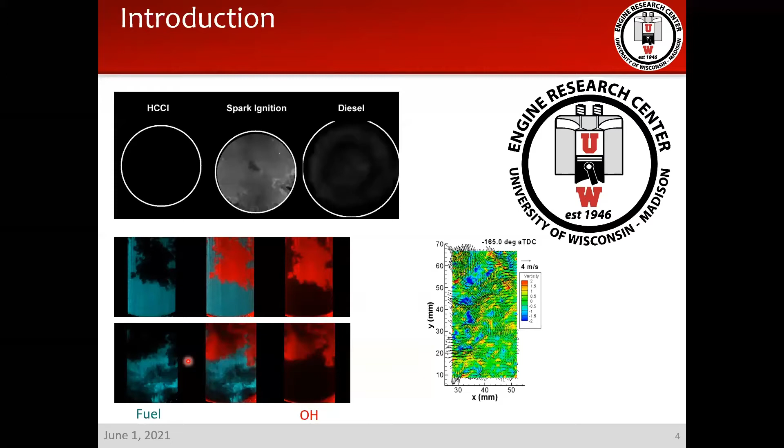So let's define the problem. If we're going to compare batteries and engines, we need to know on what grounds we're going to make the comparison. The first possible choice is local air quality - all of us enjoy breathing clean air, and there's obviously a difference between batteries and engines in that regard. But my argument is that the legislative environment is going to control this problem.

Engines have been regulated for 50 years now in terms of pollutant emissions. That has made major advances in terms of air quality, and as needed, I'd argue that's going to continue to happen locally. It's not really the controlling factor for this discussion about batteries and engines.

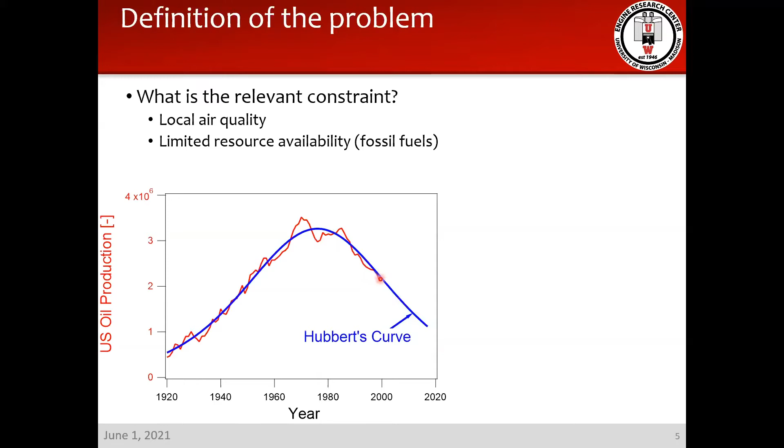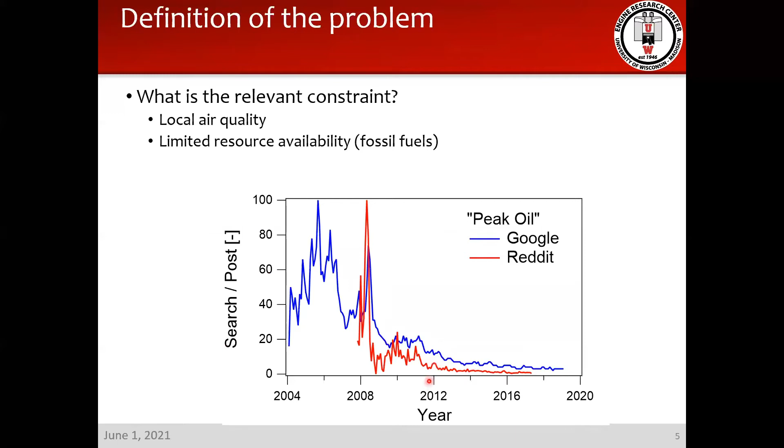Circa 2000, for US oil production, we were on the downside of that curve. If you look at searches on Google or Reddit from 2004 up to 2015, 'peak oil' was a search term quite frequently - but then at about 2012 it almost goes silent. Why? Because a number of enhanced recovery techniques came into play, and US oil production jumped in the last decade or two back to near its peak level.

So at least in the United States currently, the availability of resources isn't a controlling factor. I'd argue we know how to synthesize hydrocarbon fuels, so it's really an economic problem - it's far cheaper to drill a hole in the ground and pump oil out than it is to actually synthesize a fuel.

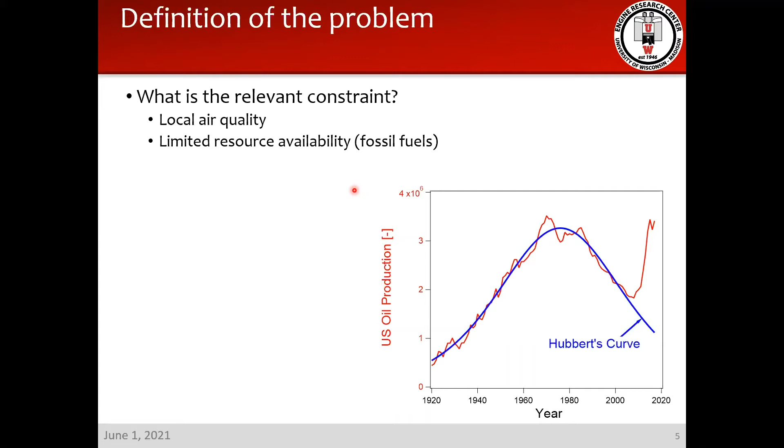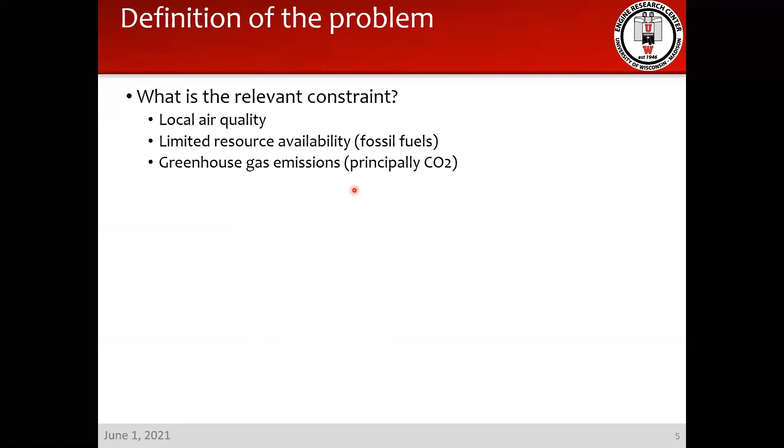But in the short term, I would still argue that we have the ability to produce liquid hydrocarbons for onboard energy storage. So that then leads us to greenhouse gas emissions, and principally carbon dioxide.

So this plot, I think everyone's familiar with, the so-called Keeling curve, where we're looking at measurements of the carbon dioxide concentration at the Mauna Loa Observatory in Hawaii. Over the past 60 years, the carbon dioxide in the atmosphere has increased from a little more than 300 to now more than 400 parts per million.

And the argument is usually made that CO2 in the atmosphere has always been varying. So if you go back and look at ice core data and the CO2 concentration in the little bubbles in the ice, you can analyze the amount of CO2 in there. If we go back 10,000 years, we see that the concentration for the past 10,000 years or so has been about 260 or 270 parts per million until the last 100 or 200 years.

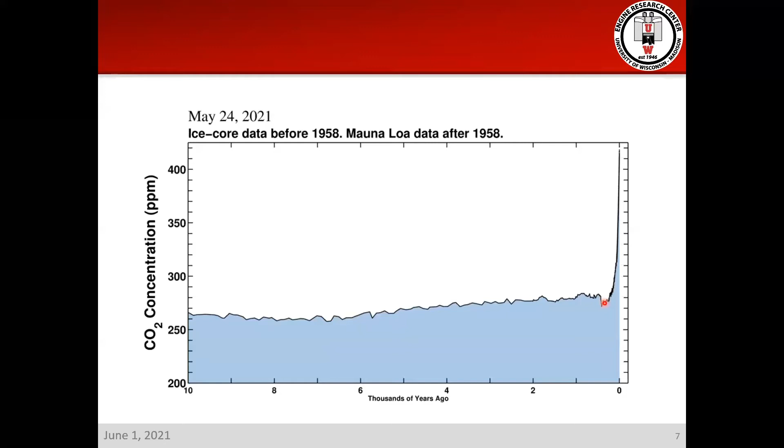You say, oh, that's when the Ice Age was. Well, we can go back even further in ice core data. So now we're back 800,000 years, and we see that the concentration of CO2 does vary over time, but it's really never exceeded 300 parts per million.

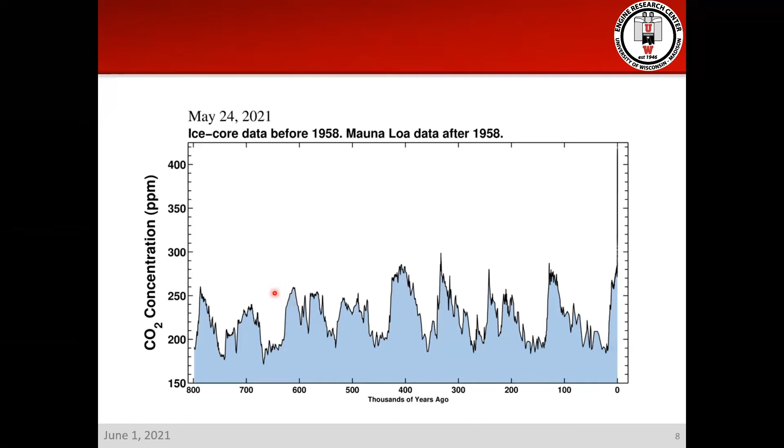And so I would argue then that the effect of greenhouse gases is really the problem that we want to focus on as we compare batteries and IC engines. The observed increase in CO2 is entirely explainable by human activity. You can go through an exercise and prove that that increase in CO2 in the atmosphere is indeed caused by human activity.

CO2 has a high greenhouse potential. It is able to trap radiation from the Earth as it goes out towards space, and that can, and most likely is, leading to climate change. So the first point, of CO2 production, that I would say is unequivocal.

The second point, people can still argue about how that happens given the long time scale of the climate, but I would argue that it is having an effect. So I think my point of view is we want to focus on the global aspect of CO2 as the measure by which we're going to compare engines and batteries.

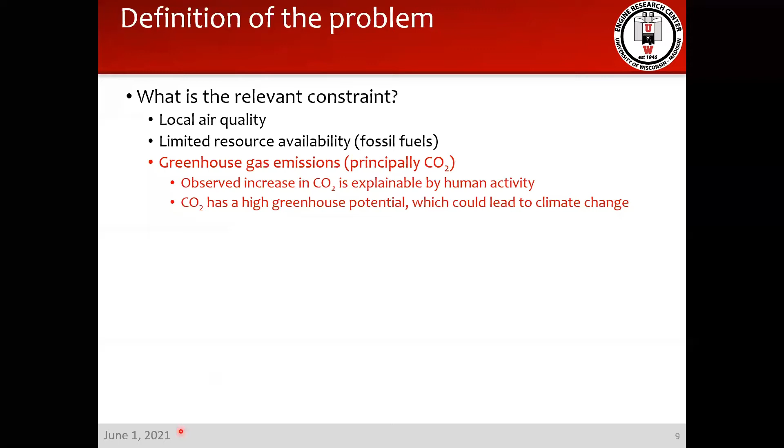All right, let's move on. So how do we do this comparison? My dashed black box here is what I'll call a vehicle. On the vehicle we have energy storage, and we have some device for energy conversion. At the end of it, we have a shaft that's spinning, and we extract power from that, so we have torque on a spinning shaft.

For a vehicle application, we're going to hook that up to the wheels. For other applications, it might get hooked to a pump or something else. But what we want to do is make the comparison out here, on the shaft. So what does it take to make this shaft spin and produce a certain amount of power?

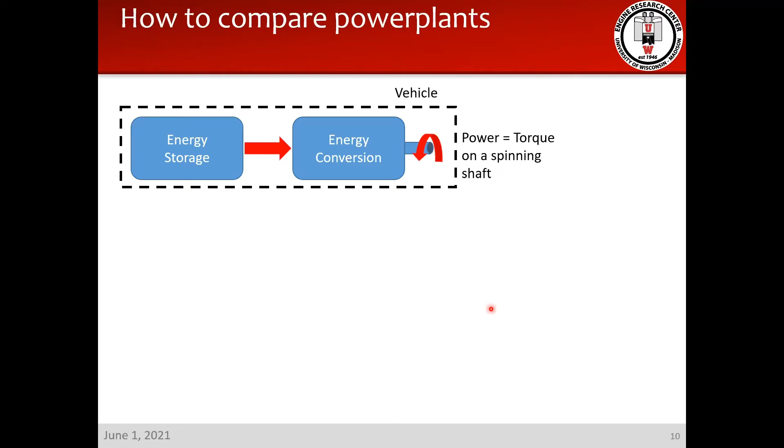Let's look first at the case of liquid petroleum fuels. So now the storage system is the liquid hydrocarbon fuel, and my energy conversion device is going to be an engine. I need to make a few simple assumptions: the hydrogen to carbon ratio for the fuel we're going to fix at 2, which is close, a little bit high. And the lower heating value, LHV, of the fuel is going to be 42 megajoules per kilogram, a typical number for fuels.

The energy conversion process has an efficiency associated with it. I'm going to split this into two categories: SI for spark ignition engines, for light duty applications, we'll assume an efficiency of about 0.2, so 20%. For compression ignition, like a heavy duty diesel type engine, those engines are more efficient and their duty cycle is such that they run at higher efficiency, so we'll assume an efficiency of 40% for the diesel engine.

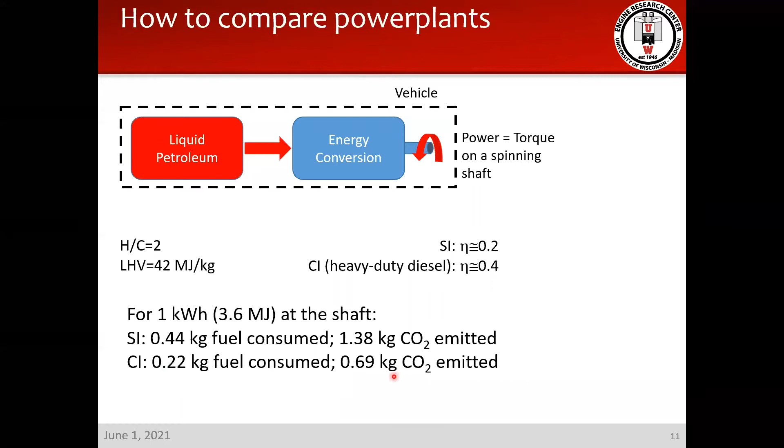If we do this comparison on an energy basis, batteries are typically rated in terms of kilowatt hours, so we're going to do this for 1 kilowatt hour at the shaft, meaning this shaft is producing a kilowatt of power for an hour duration, equivalent to 3.6 megajoules of energy on the shaft. For the spark ignition case, that's going to consume 0.44 kilograms of fuel and produce 1.38 kilograms of CO2. Likewise, for that same amount of energy on the shaft, about half of that fuel consumption and CO2 production for the diesel case.

All right, so now we have the electric powertrain case. Our energy storage device is now a battery, and our energy conversion system is basically taking energy out of the battery and putting it into an electric motor. That onboard conversion efficiency, eta sub O, we're going to assume at 90%. That's probably realistic, maybe a little bit on the high side.

So that's obviously much better than what we saw for the spark ignition engine. But we need to get energy into the battery, right? And so there is a power plant somewhere, and that power plant obviously produces electricity, and then there is an efficiency in line going from the power plant

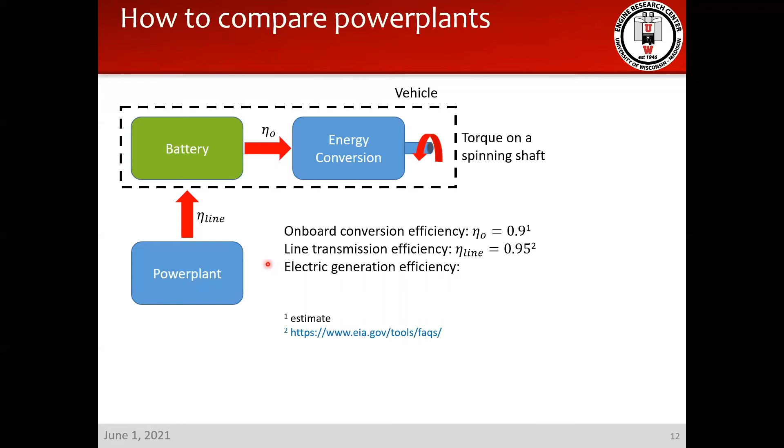to your charger, and the line transmission efficiency is 95%. The reference for that number is here. And then we have the electric power plant itself. This graph shows the US electrical power generation for 2 years, 2009 and 2019. Let me just quickly go through these categories.

Orange is 2009 and blue is 2019, in 6 different categories across the bottom. So solid, liquid you should just think about as coal - most of this is coal-fired power plants. Gas, these are mainly natural gas-fired power plants. Nuclear, hydroelectric, solar, and then other renewables.

A couple of significant trends have happened in the United States over the last decade. We've reduced the amount of coal-fired power plants by about a factor of 2. Most of that has been taken up through natural gas power plants. And the remainder has been filled with a combination of solar, which in 2009 really wasn't contributing significantly, and other renewables, which you should really consider to be wind. So solar and wind have ticked up quite substantially, as has natural gas, all while consuming less coal.

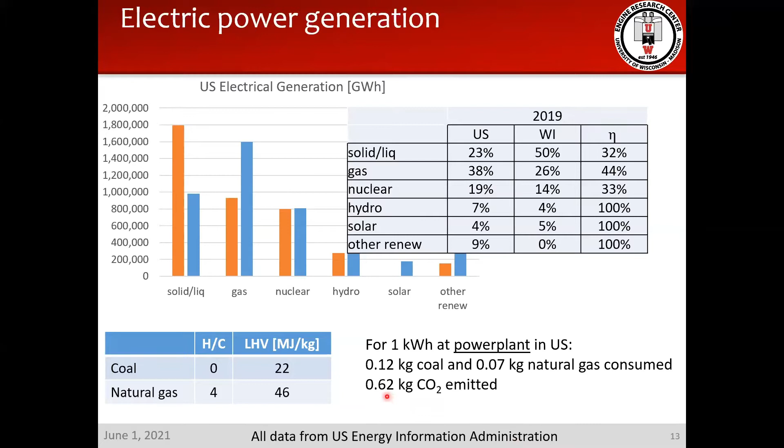And then at the power plant, we can determine how much, for 1 kilowatt hour at the power plant, what does that require? Well, it's going to require for the US 0.12 kilograms of coal and 0.07 kilograms of natural gas. So a realistic estimate of how much carbon or CO2 is going to be produced is 0.62 kilograms of CO2 for a kilowatt hour at the power plant.

So if we go back and do the comparison on the shaft, those numbers change a little bit. We're up to 0.14 kilograms of coal and 0.73 kilograms of CO2 for an electric vehicle at the shaft. And if we combine those numbers in one simple place, so for a kilowatt hour of shaft power, or energy, this is how much CO2 gets produced.

So for the SI engine scenario, 1.38 kilograms. For the electric vehicle scenario, 0.73 kilograms. So a significant reduction in CO2 relative to spark ignition engines. For diesel or compression ignition engines, it's actually pretty close. If we do the comparison for the state of Wisconsin, we give back a lot of that benefit in terms of CO2.

So in a sense, that kind of is the story for CO2, but there's more to this story, of course, than just the impact in terms of CO2. And so we need to look at a few other things.

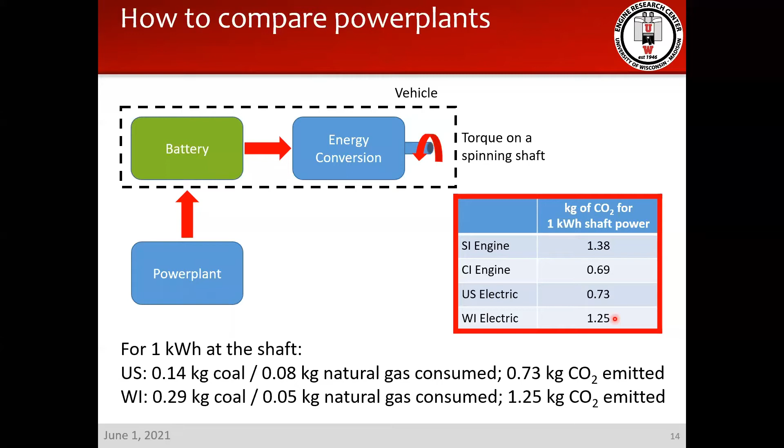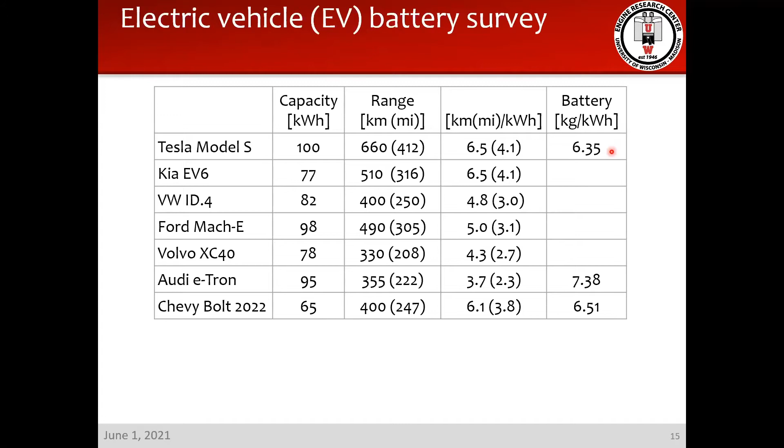These are all electric systems. The range is the quoted value from the manufacturer, anywhere from 330, which would be the heaviest vehicle, up to 660 kilometers of range. If we work out kilometers or miles per kilowatt hour, that's this column, so in the best case we're at about 6.5. Not every manufacturer lists the battery weight, but the ones that do, I give you the value in terms of kilograms for the battery per kilowatt hour.

So some comments on range of electric vehicles. Here's a nice quote: some drivers will get 4 to 5 miles per kilowatt hour, already lower than the 6.5 we saw a minute ago. A leadfoot like me, driving in the cold and blasting the heater, might get only a couple of miles out of that same energy. So that suggests the end use and the environment of that use is going to have an effect.

There's a website, ev-database.org, which is independent of the manufacturers, that gives what they call real range estimation. The right side of this figure corresponds to mild weather, 23 Celsius with no air conditioner use. The left side corresponds to cold weather, minus 10 Celsius with the heater in use. Minus 10 Celsius might seem ridiculous in Abu Dhabi, but in Wisconsin we have weeks in the winter where we don't see a temperature as hot as minus 10 Celsius, so for me cold weather is a reality -- maybe for you it's not so much. But if you look at the bottom number, the combined estimate of range, you go from 445 to 335. So there's a 25% reduction in range corresponding to cold weather.

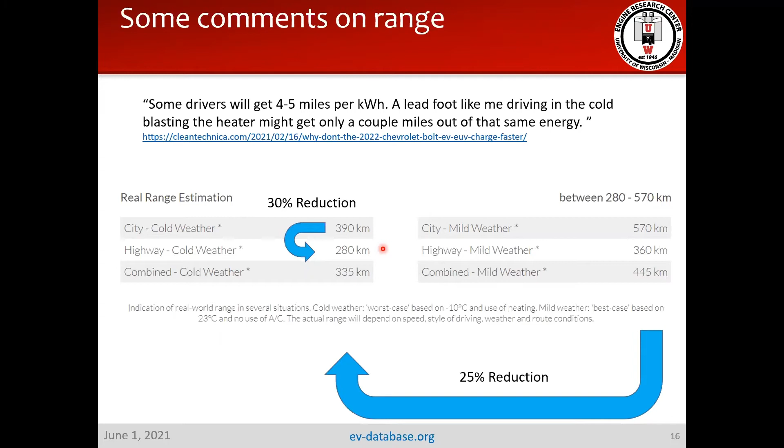So that means that in the city, in mild weather, you might have a range of 570 kilometers, which is of course what the manufacturer puts on their advertising. But in reality, for highway driving in cold weather, you're at roughly half of that -- a significant difference in range than what is expected. So we'll keep that in our back pocket.

And we need to talk a little bit about charging. Different vehicles have different recharge rates. This blue column here -- the first two columns are what we saw before -- is the published recharging rate, and it ranges from 50 kilowatts up to about 270 here for the Audi.

So what are conventional chargers? A level 1 charger is basically just plugging it into the wall in your house, that would be 2.4 kilowatts. If I wanted a level 2 charger at my house, I'd have to have a special high voltage feed installed, getting us up to 19 kilowatts. Typical fast chargers are 50 kilowatts. The Tesla supercharger, which they're building a network of on highways, is at 120 kilowatts. The two gray versions at the bottom are somewhat experimental demonstrations where 350 and 450 kilowatt chargers have been built and demonstrated.

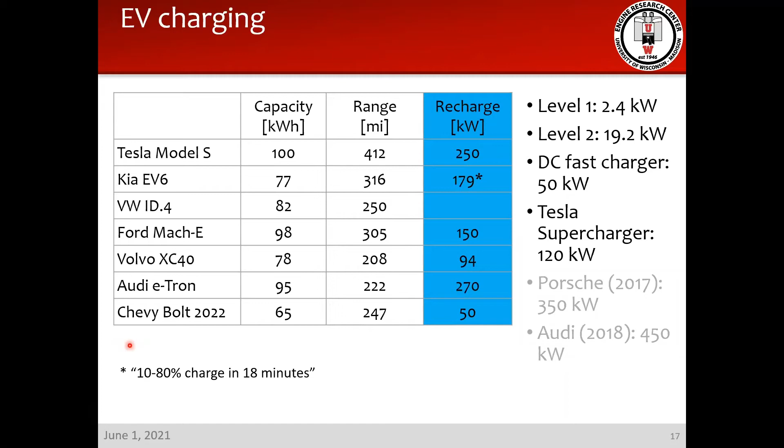So we need to understand better the issue of battery charging. I don't know much about that, as I showed you before, but I found this review paper, a relatively recent review about fast charging lithium-ion batteries.

For charging purposes, what happens is the following: there's a lithium atom in the cathode. We're going to strip an electron off of that lithium atom. That electron then goes into the charging circuit, and that leaves a lithium ion at the surface that needs to get migrated to the surface of the cathode. It then transports across the electrolyte to the anode side. Now I have the lithium ion at the anode. It combines with the electron, produces a lithium atom, and that lithium atom now needs to basically get out of the way, so it needs to diffuse into the anode, into a storage site for later use.

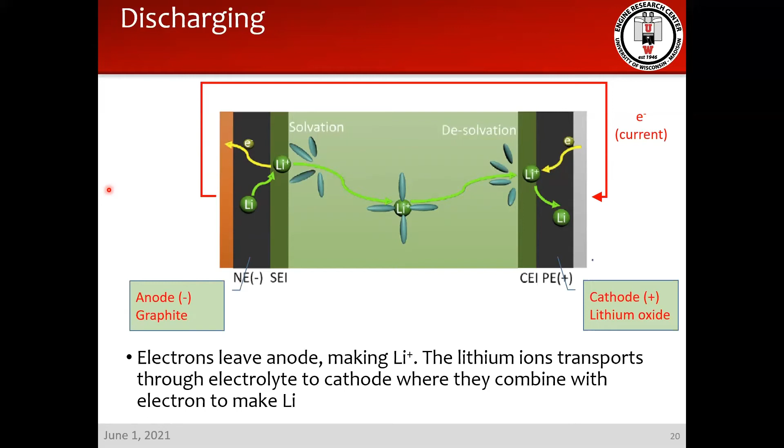That later use is when you discharge, and this process reverses. That lithium atom that we put in the anode, we're going to strip the electron off of that, make a lithium ion. It's going to transport over to the cathode, and that electron then gets used in the circuit. So that's the fundamentals of how a lithium ion battery works.

So some comments, or a discussion of fast charging. The first is that the charging rate is controlled both by the charger and a battery management system. There is a very sophisticated set of software that controls how the battery works, and that's critical. So one takeaway from this is that even though the charger, the Tesla supercharger, might be at 120 kilowatts, the battery management system is not going to allow 120 kilowatts into the battery unless it thinks it can handle that. It will throttle the rate of charging to be appropriate for the battery at its current state.

Typically the charging rates are limited to 1 to 1.5 C. The C rate is a battery term that defines how fast it's either charging or discharging. So 1 C means, if we're talking about charging, that you can fully charge the battery in 1 hour. 2 C then means you can charge it faster, which would be a half hour. The Porsche system that we looked at a minute ago is a 3 C system.

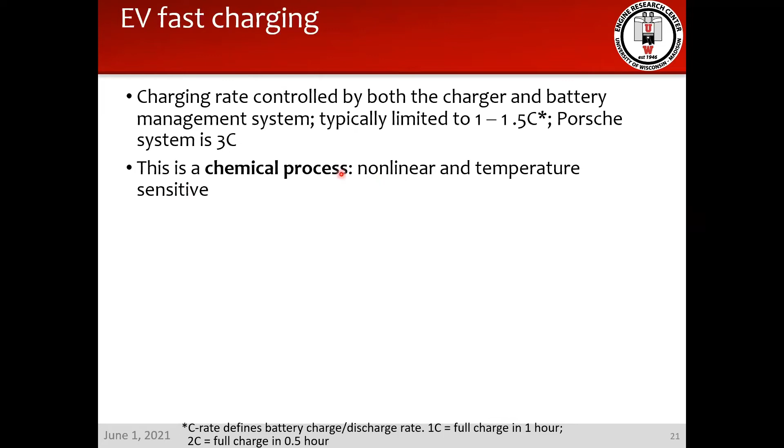The second thing is that this is a chemical process - that physical transport is a chemical and transport process. Those of us that grew up in the combustion world know one thing about chemical processes, and that is they're nonlinear and very highly sensitive to temperature. The other thing we know about chemical systems is that usually there is a rate limiting step in the process. In this case, for lithium-ion batteries, the rate limiting process is the rate of lithium diffusion into the anode.

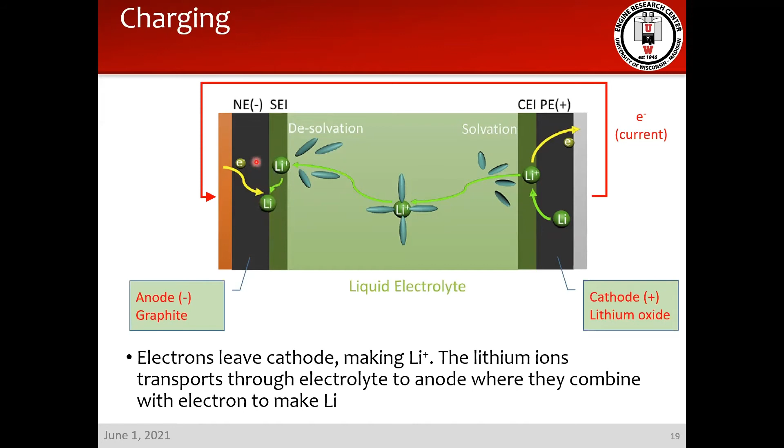Let me go back up and explain. The lithium ion comes over, lands on the surface of the anode. It combines with the electron to make a lithium atom, and then it has to diffuse into the anode for storage purposes. If it doesn't diffuse in fast enough, meaning before the next lithium ion comes, you can actually plate the surface of the anode with lithium. So the rate limiting process is really this lithium diffusion in the anode. The failure mechanism, if you will, is the lithium metal plating the anode surface.

Low temperatures inhibit this diffusion rate. So actually for fast charging of batteries, you have to preheat the battery. There are heaters in the battery to bring it up to temperature to basically increase that diffusion rate to allow faster charging.

And that is that if you've got lithium plated on the surface, that lithium isn't free to carry charge across the battery. And so you lose capacity because of that.

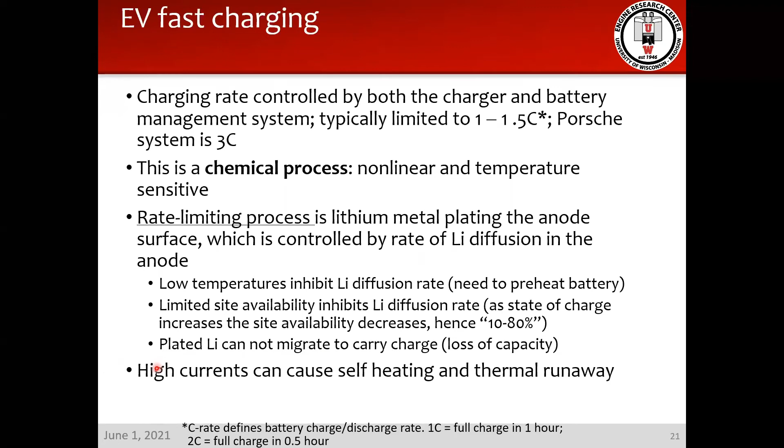And then obviously high current is going to cause problems as well. I think we're all familiar with self-heating and thermal runaway issues.

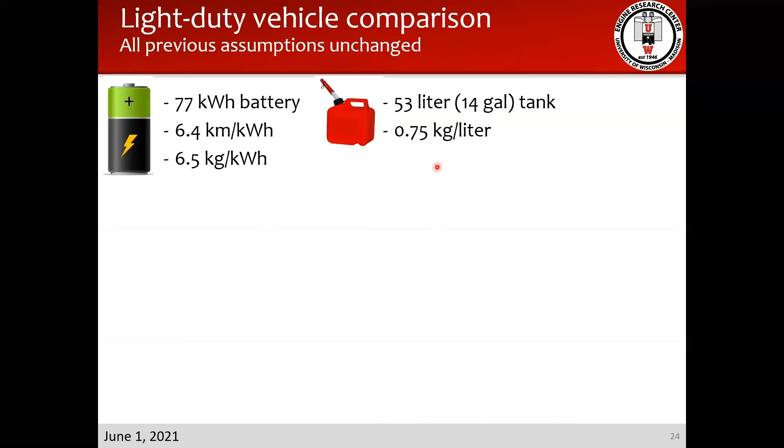We're going to do the comparison for a 77 kilowatt hour battery. The 6.4 kilometers per kilowatt hour and 6.5 kilogram per kilowatt hour come from previous data that I showed you. For the gasoline, we'll assume a 53 liter tank and a density of gasoline of 0.75 kilogram per liter. And then we're going to do all of these comparisons again at the shaft itself.

So if we look at the onboard storage for those two scenarios, the green is the electric, the red is the gasoline, and we see in terms of shaft energy, it's actually quite comparable. We get 69 versus 90 kilowatt hours.

If we look at range, under all the assumptions above, the gasoline gets you 643 kilometers, mild weather city driving puts you at 493. So again, not too far off. On the other hand, if we're on the highway and it's cold, now the range is going to drop by about a factor of 2.

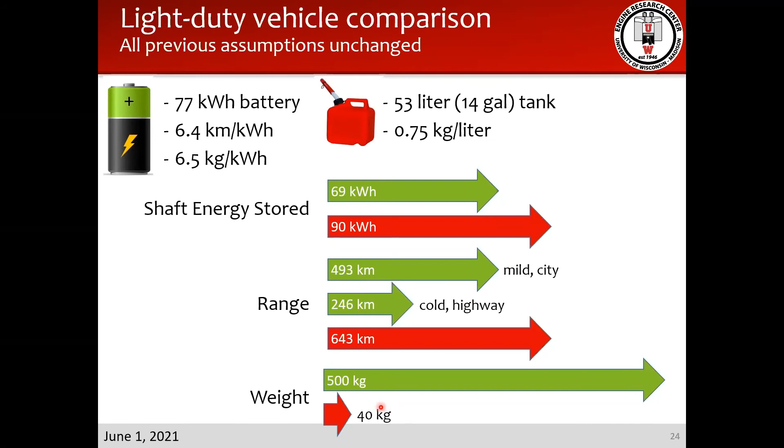Weight, well, here's where we start running into some issues. The battery is going to weigh 500 kilograms. The fuel load is going to be 40 kilograms. So there's a significant penalty in weight, to say the least.

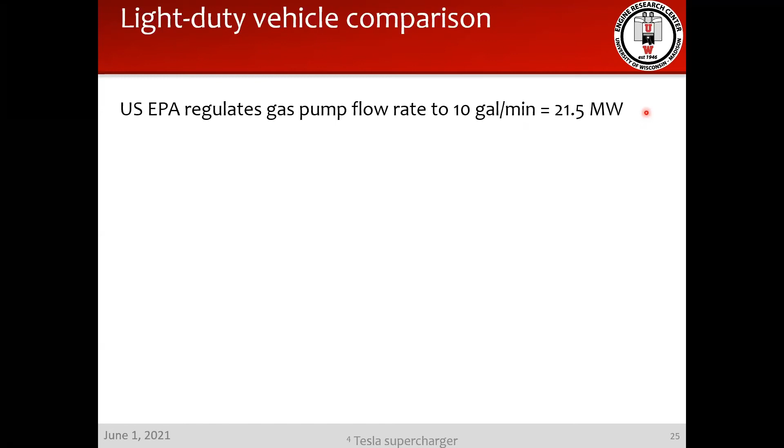On to the recharging. The US EPA limits the flow of gasoline at a gas station to 10 gallons per minute. That works out to 21.5 megawatts of power. And if we look at the energy recharge rate, again in terms of shaft potential, we're doing this for the Tesla supercharger. For gasoline, we're at 4,300 kilowatts. For electric, we're at 108.

So there's a 40-fold difference in recharge rate.

A few other comments. The full range for highway travel is about 25% lower than the manufacturer quoted value, which is the city value. So instead of roughly 500 kilometers of range, we'd really have about 345. And if it's cold, we're down to about 260.

The recharge is limited to, roughly speaking, about half of the capacity of the battery. And that usually, most manufacturers quote that at about 15 minutes, so a quarter of an hour. So that's a 2C rate.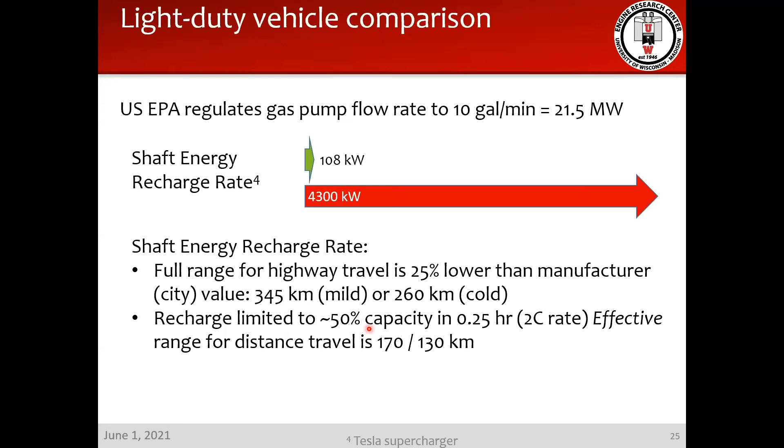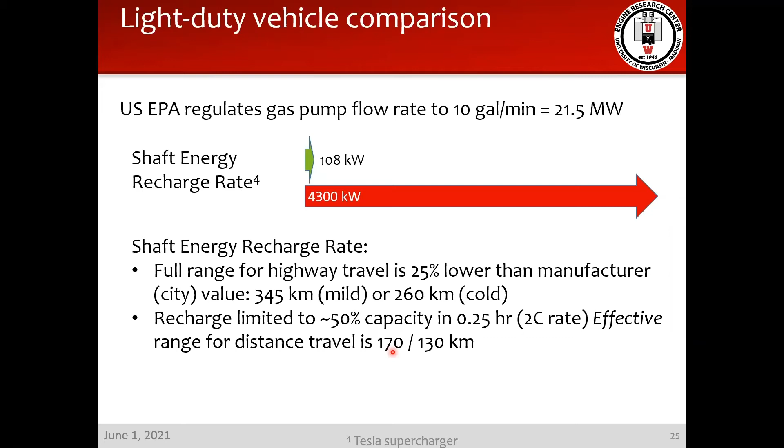So really, what does that mean? It means if I want to drive a long distance, I can really only do it for about 50% of the battery capacity, because otherwise it's going to take significantly longer to recharge the battery. And that means that I go from 345 down to about 170 kilometers of range. So the quoted value was 500, but effectively we really can only go about 170 kilometers if we want to have a fast recharge of the battery.

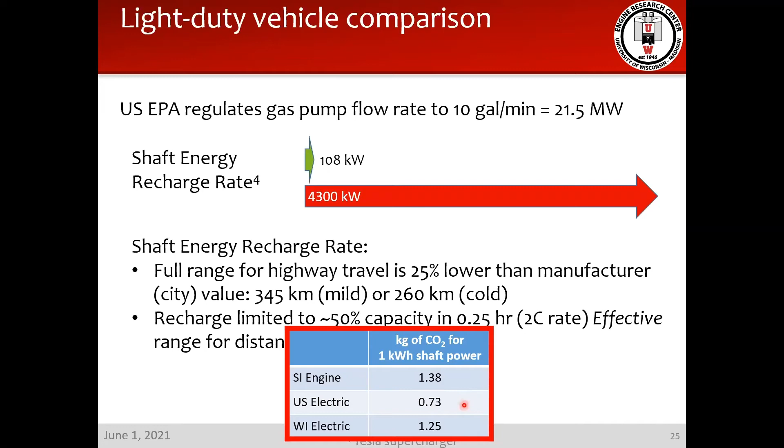Okay, just showing you these numbers again. In terms of CO2, there's still a net win in the electric world. Some comments about the light duty application.

So at highway cruise speeds, SI engines are actually significantly more efficient, probably 35 or 40% efficient. So that CO2 penalty is much less.

The CO2 for the battery vehicle is coming via basically how we produce electricity in the United States. That will continue to decarbonize, which is a good thing. The issue is the lower level of that is sort of a base load. So at night, when the sun isn't shining and no wind is blowing, I still want to run the refrigerator in my kitchen. And so that base load currently is coming from nuclear and fossil fuels, and nuclear isn't growing in this country. So there is basically, the floor for fossil fuel production of electricity is not zero, I would argue.

Urban driving should be done on electric power. There's a CO2 benefit, and in addition, it's going to improve the local air quality.

The flip side is that batteries are not, in my opinion, a good power source for long distance travel, because rapid recharging only is going to give you about 50 or 70% of the battery capacity, still takes 15 minutes, and the range estimates are what we discussed a minute ago. So we have significantly shorter range. If I have to stop every 150 kilometers for 15 minutes, that's not a workable solution.

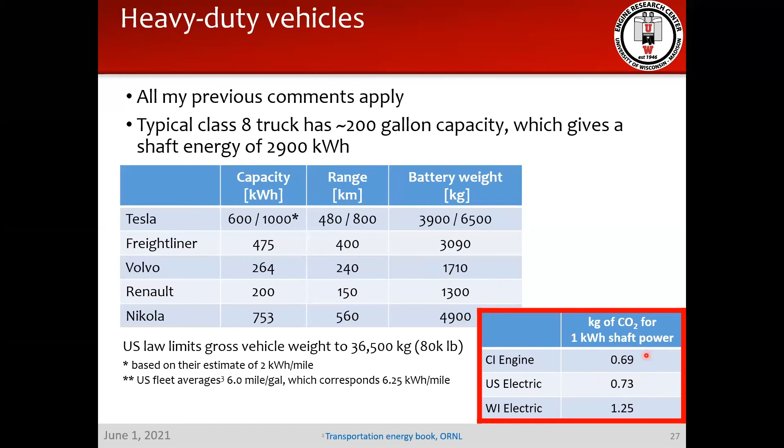For long haul applications, the CO2 potential or benefit isn't as significant as one might like, so my opinion is long haul applications are not viable at present. Based on what we just looked at, electric heavy duty vehicles are really targeted for last mile delivery - urban transport of goods, and that's totally reasonable. You have significant regeneration, and significant benefit in terms of local air quality and efficiency. For long haul applications, the CO2 considerations really aren't there.

Just very briefly, off-road applications - if you don't have a charging infrastructure, like if you're thinking about forestry or something like that, then electric makes no sense. If you have to burn fuel to make the electricity on site, you should just burn it right in the vehicle.

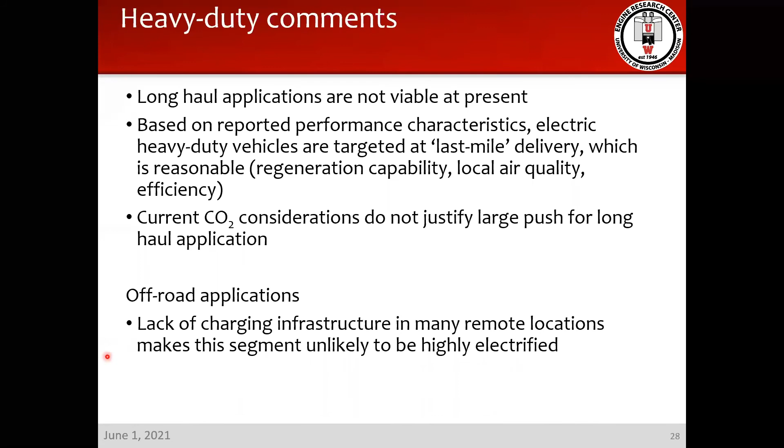A couple of final observations about batteries, on a shaft energy basis, comparing with gasoline. You store a comparable amount of energy for light duty, but you have a higher upfront cost. So HEV - hybrid electric vehicle, plug-in hybrid vehicle, electric vehicle - you know, from $200 to $7,500 for just the battery.

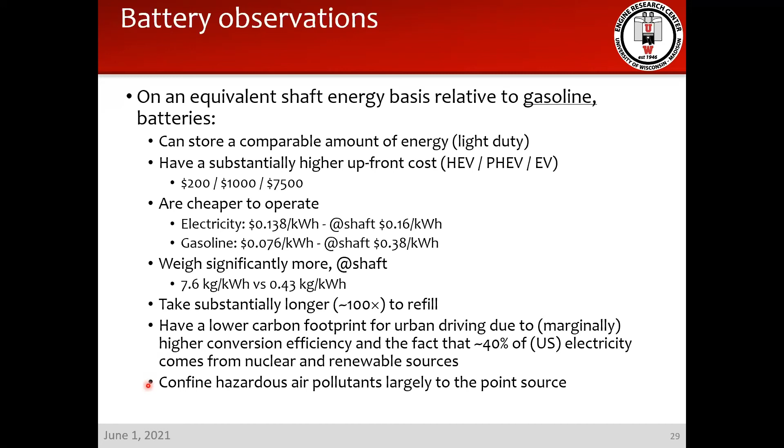They're cheaper to operate. This is the rate we're charged for electricity in Madison, Wisconsin - that works out to about 16 cents per kilowatt hour at the shaft. For gasoline, this is a US average number, and that's 38 cents per kilowatt hour. So it's somewhat cheaper to operate. They obviously weigh substantially more, and take substantially longer to refill. They have a lower carbon footprint, but the benefit is they confine hazardous air pollutants to the point source of the power plant.

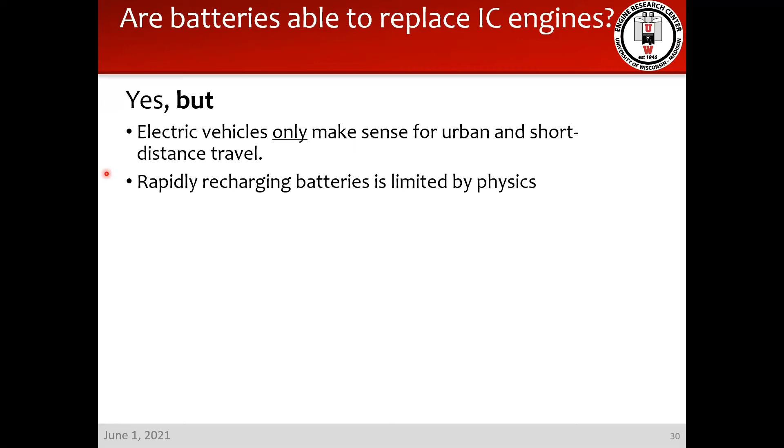So are batteries able to replace IC engines? My argument is yes, but there are always buts that go with it. They only make sense for urban and short distance travel, in my opinion. The rapid recharging problem is limited by physics - Elon Musk can't wave his magic wand and automatically refill your battery. Physics is involved, and that's really going to be the problem. I don't see that problem moving by two orders of magnitude like it needs to.

The ultimate answer for CO2 is really going to be this competition. If we are going to have zero net carbon electricity production, that has to be enabled through large-scale energy storage, so that we can have complete renewable fuel for electric power generation - then the battery option actually becomes very low CO2. The competition is between that solution and having an economically feasible low net carbon fuel - if I can have basically zero net carbon fuel and burn it in an engine, for example for long haul truck applications, that would be a good option, quite frankly.

One caveat - to do this correctly, you need a very rigorous analysis of actual driving data and a complete well-to-wheels analysis. Batteries have kind of been given a free pass, but lithium isn't free - it comes by scraping the earth and pulling the lithium out of that.

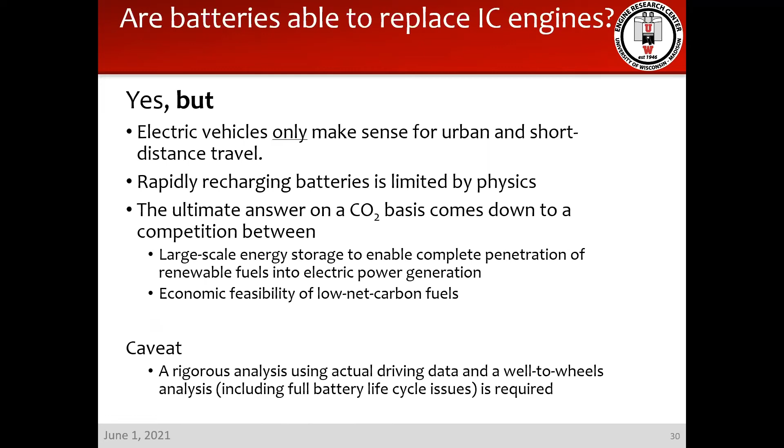So just quickly in closing, all of this is, if you will, my crystal ball. If you look through this crystal ball, you see that it's very cloudy. I think everybody's crystal ball is that way. So I might revise these comments in 5 or 10 years from now. And with that, I thank you for your attention, and I'm happy to answer any questions that anyone might have.